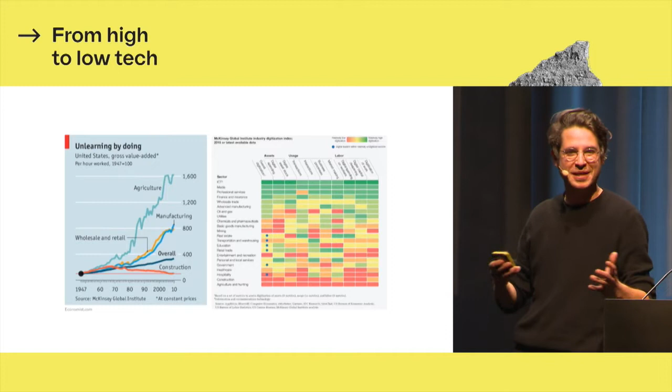But actually, that's not entirely true. In the Western world, agriculture is highly automated. So the only profession that is less automated than construction and architecture is hunting, which I hope we keep like this, because hunting should be a craft, right? We don't want to start hunting with robots and drones, I hope. But I don't believe that construction and architecture should be a craft. I think we should actually consider automating that.

That's 1947, right? So we could say that since Le Corbusier started building the Unité d'Habitation in Marseille in 1947, whatever we have done in architecture and construction has not fundamentally changed anything. Despite BIM, despite AutoCAD, anything. We're not building any better now than we did then.

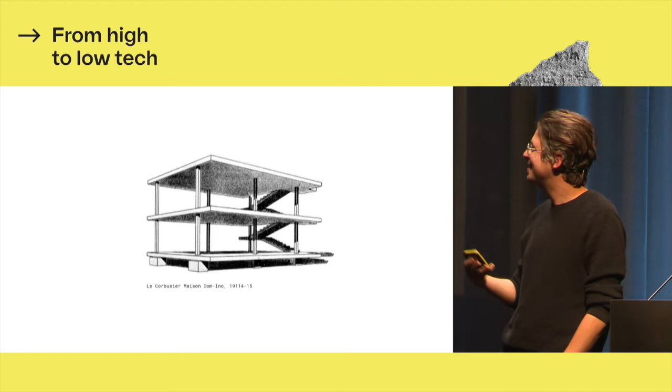That also means that this model, probably one of the most stupid and at the same time one of the most intelligent models, is still unbeatable. This is the best model. We cannot do better than this, right? And that's the beauty of architecture. If you try to be too smart with architecture, it always hits back at you. It's quite a blunt profession. It doesn't tolerate too much intelligence.

But it could maybe have been us. It could maybe have been us architects building these 2 billion homes, if we had not stopped thinking about it. In 1972, modernism officially ended, according to Charles Jencks, with the detonation of one of the largest housing projects in the world, Pruitt-Igoe.

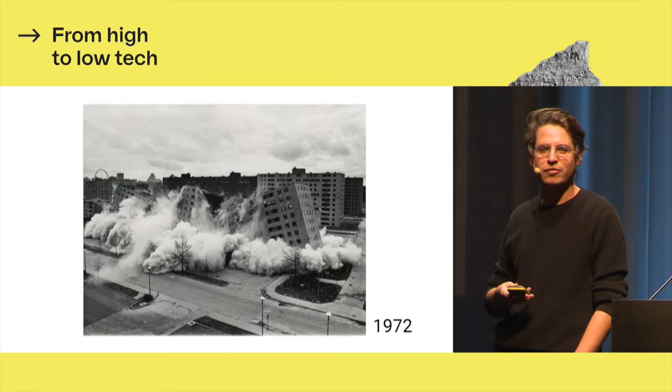And since then, we have stopped that project of thinking on a large scale about architecture. We have stopped being utopian. We have stopped kind of believing in a future and also in a kind of societal role for architecture. And since then, architecture is this. I'm from Belgium. The entire architecture world is now Belgium.

I call that Belgification. So Belgification is, on the one hand, a gift because Belgian architecture is extremely beautiful. It's very well crafted, it's very creative, but it's also extremely, extremely small scale. These people will not build 2 billion homes for you. There is no idea about building 2 billion homes.

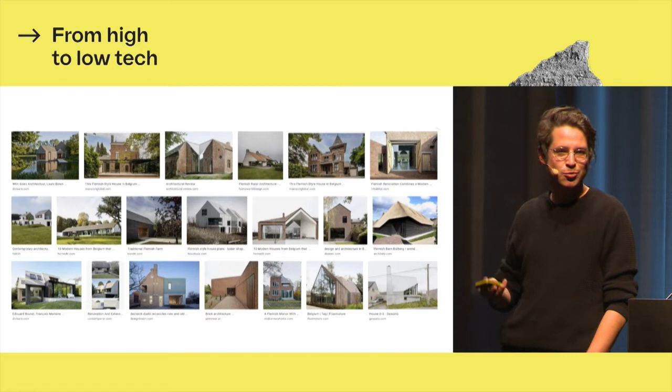And it's not only Belgium. I mean, Spain has been Belgified since the financial crisis in 2008. There were some big ideas in Spain, but now they're gone. Now they're just doing really beautiful, really good work. France has been radically Belgified, which is nice because normally France does things to us, so now we do things to France, so that's nice.

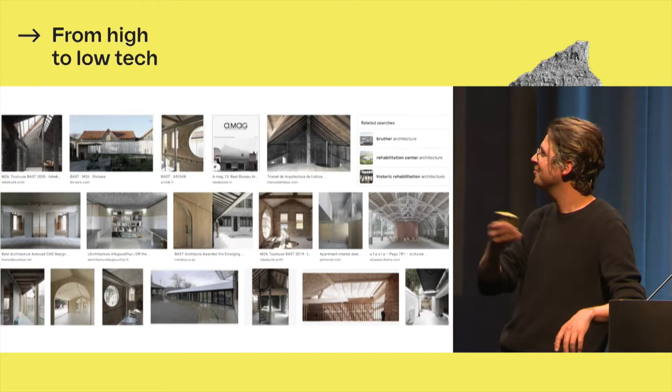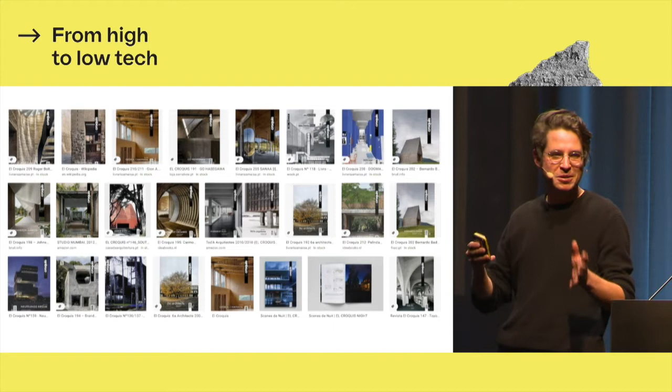But generally, are there any intellectual ideas today in architecture that are able to tackle even that question, right, of building homes on a massive scale? I mean, architecture, I believe, truly has never been as good as it is today. It's just incredible how much incredibly good work there is. I can't buy all of these books. It's just endless. And there's so many good practices, but they're all what you would call boutique practices. 10 people, 15 people, beautiful houses, beautiful libraries, maybe here and there.

And that model of architecture treats every building as a prototype. Every day for an architect is a new day. This is architecture today. It reminds me of this really bad Adam Sandler movie, which you absolutely should not watch. So he's dating this girl, and she forgets every day her entire life. So every day they need to start dating again from scratch, right? It's nice in Portuguese, like every day is the first day. And that's architecture. Every project we do, we start again from scratch.

And my question is really, and that's maybe the main provocation, if a building is good, why don't we repeat it? What's the problem with repeating a good building? If you design a good building once, why don't we do it 1,000 times if it's that good? Like London, where I live. London is a repetition of the same building. Every building is the same building. It's a pretty good building, not particularly interesting. There's no concept behind them, but they're pretty good. Everyone wants to live in them. And why would we have to design every building again? If you have a good one, why not repeat it, right?

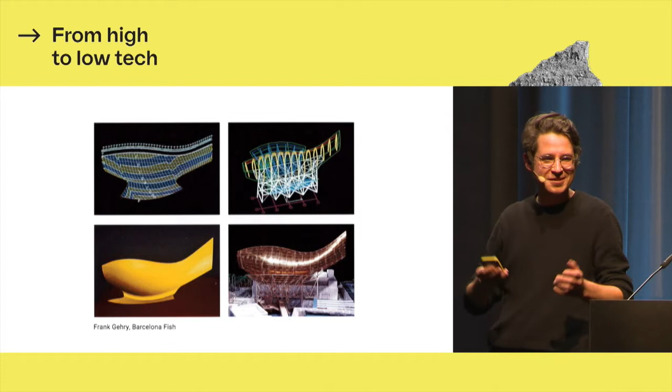So it could have been us, architects. It could have been us also when we started to work 20, 30 years ago with digital design methods. We were really good at that. But the question that we were asking, what to do with these digital methods, had nothing to do with a societal question. It had nothing to do maybe with how it could change the profession of an architect. It was actually a boutique question. It was how to, instead of repeating buildings, make sure that every single building is even more different than it was before. Right? So that is the kind of architecture that you associate with digital, like what I learned in school many years ago.

And again, it's not that I don't like this work. I think it's very optimistic. I think it's interesting. It was daring. It was also completely defined by a context before the financial crisis, by a neoliberal context. There's no housing there, right? These were museums for wealthy people.

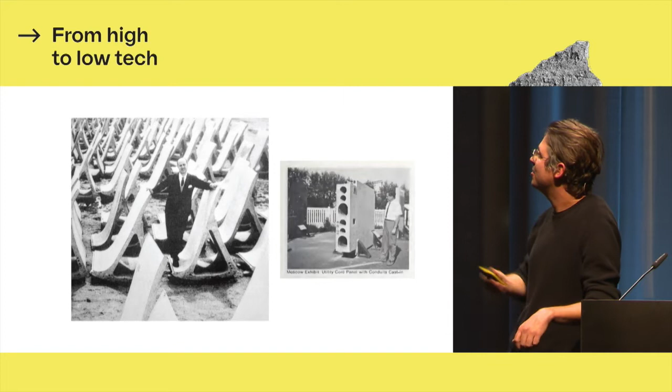Oil sheikhs, etc. But it could really have been us, I think, if we look back at what's happening both east and west of the Berlin Wall in the 70s, in the 50s, with people like Miguel Fisac who are questioning fundamentally how we should build. This guy tried to make his own factory. He designed the elements that he wanted to build with. He was not going to build with a brick or a piece of timber. He wanted to reset construction from scratch and reinvent it. Or this unknown Soviet engineer, I find this a beautiful picture, who's posing next to the panel that he has created, right? It could have been us.

It could have been Walter Gropius and Konrad Wachsmann. After they left the Bauhaus, they started the General Panel Corporation in 1948 with the idea to build 10,000 homes a year in the United States. They built a factory. It produced 20 homes. And it was a beautiful idea. It was the idea to repeat one single idea for a building 10,000 times.

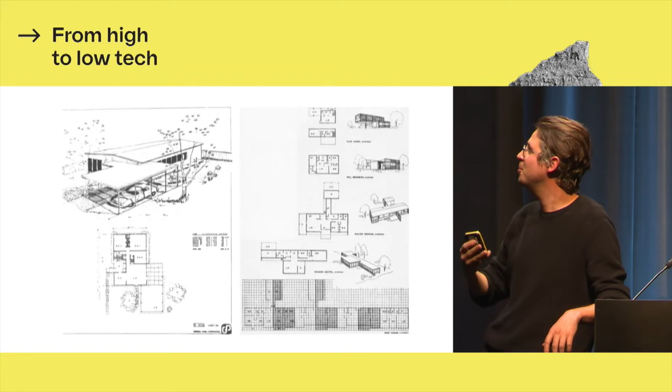But never exactly, because ultimately they are architects, so it would never be exactly the same building. Every building was a combination of parts, and it would always result in something slightly different. They were even teaching this at Harvard. The students could only work with this kit of parts of Wachsmann and Gropius, and then you could design buildings with it.

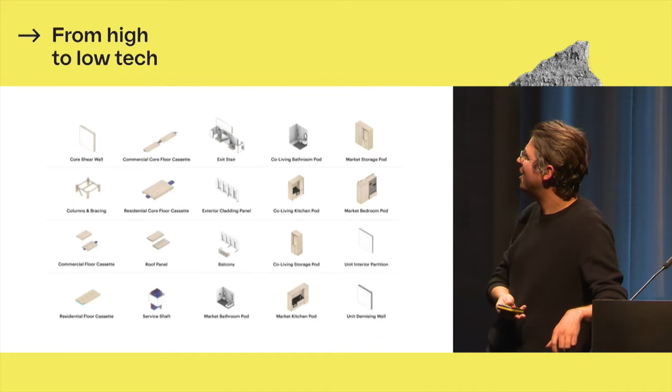So who will it be? It will be tech. It will come somewhere from this soup, which is a kind of a crazy ecology that we call the construction tech markets, which are companies that are engaged in all kinds of little bits and pieces of the value chain of how buildings come into being, from development to construction. And there's a small group somewhere there in the middle, Blokable, Juno, Woho, which are companies that are ironically doing exactly where architecture stopped in 1972.

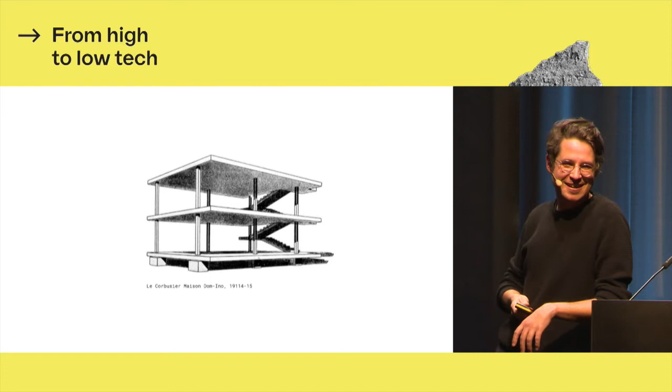So 1972, the idea was that mass housing was a social democratic socialist project. And it got stopped because we entered another era of neoliberal capitalism, Thatcher, Reagan, etc. So that project stopped. And now, ironically enough, the pinnacle of capitalism, venture capital, is looking back at where we stopped as architects and is taking this into a new context. So they are working with, in a way, this guy here, and they're trying to automate that guy. And they're trying to repeat this guy thousands and thousands of times.

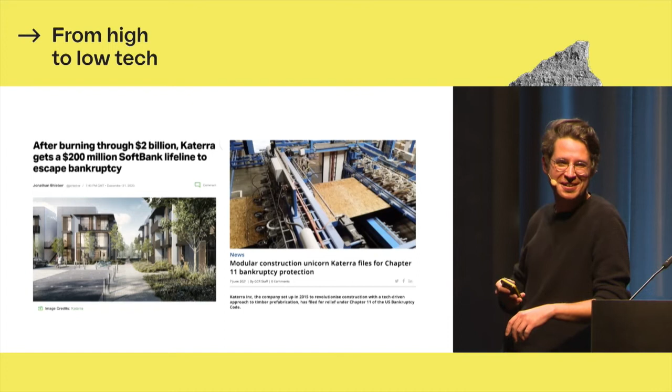So this is the house of the future. It's not very exciting, right? But on the one hand, it is also very exciting. It looks kind of unexpected, but this is really the house of the future. That's an automated house. But maybe the good news is it's not happening, because the company who was behind this was an American company called Katerra. They got $2 billion in funding that was thrown at making this house automated, and it failed. They went bankrupt, which is again kind of the beauty of architecture. Even with 2 billion, you can't do it. It's a long journey still.

And part of the reasons, I think, also is because they left really off where modernism started. They shouldn't look that much back. They should actually look maybe a bit more recent at what we could actually do with new technologies, with robotics, with automation, with AI, and not try to replicate the Soviet Union housing factory with venture capital, which is what they were doing. We need to be optimistic. Optimism is a moral duty.

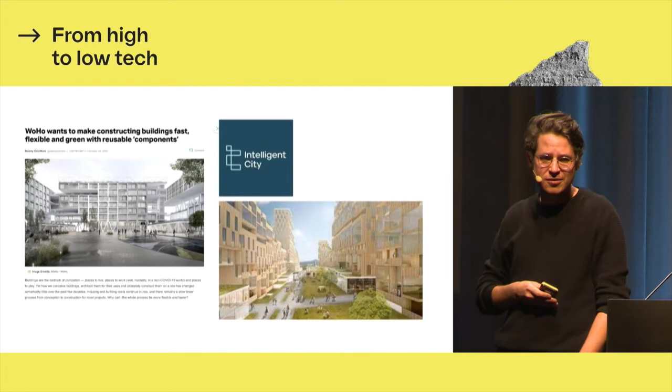There are some really interesting companies actually started by architects in this tech world. So there's Woho Systems, which is founded by Antón García-Abril and Débora Mesa from Ensamble Studio. They're doing fantastic work. They started a startup, they got funding, and they're trying to push beautiful prefabricated systems, very intelligent ones, into the world. There's Intelligent City, which is based in Vancouver, but is mainly populated with young architects who had been studying in Europe, in Stuttgart, and brought knowledge of robotics and automation to this company. And they have a beautiful vision on what architecture could do. So that's some of the provocations.

And now some propositions. So I will slowly guide you a little bit to how we are approaching this. And I'll do that a little bit with the work of my research lab at UCL, which is called Automated Architecture Labs. My own architecture office, because I also have a boutique little practice that does tiny little projects. That's called Gilles Retsin Architecture. And then ultimately my tech company that is called Automated Architecture AUAR.

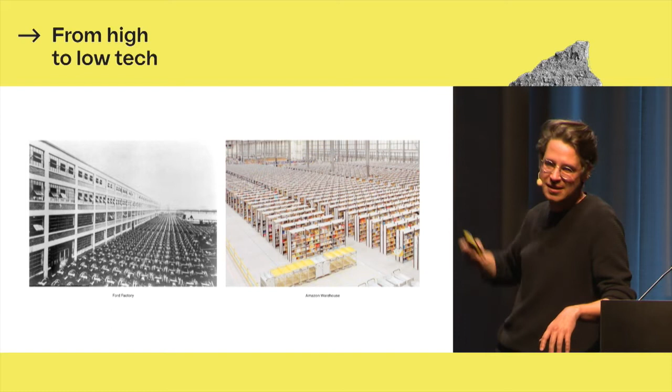And at least you see there's an ambiguous relationship, right, between these images. On a very superficial level, they don't look that different. Of course, they are terribly, terribly different. The people who work in the Amazon warehouse are gig workers. They would never be able to be like a Ford employee who was paid a decent salary and could buy their own car. That's social democracy. This is something that we maybe don't know anymore what it is, some form of neoliberalism. But we could consider automation as a very important project for architecture, probably the most important project for architecture. So that's why you should buy this book.

You can buy it on Amazon, on this evil warehouse there. You can buy this on Amazon, Robotic Building, which also has contributions of some of Fabio and Matthias and many others here, which tries to kind of lay out that paradigm, right?

Automation. And also automation, it's important, right? Because it's not only a technology, but it also has immediately socio-political consequences. There's immediately questions around labor, around work, around who is benefiting from this, who owns these robots, who owns these factories. There's many funny questions in the book there, like what is a robot? Is a washing machine a robot? These are all questions around automation.

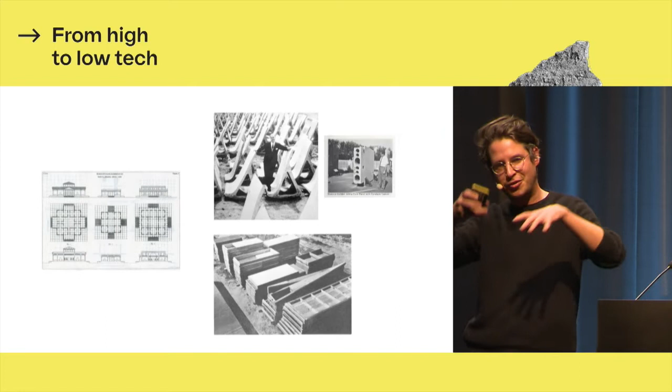And we took a specific position towards automation, and it's not the only one. You can take many positions, but my position is that I truly believe that the solution to automate architecture lies in one of the most simple and banal ideas, and that's the idea that architecture is made of parts. And that's a blunt and an interesting statement, but we could actually do a project for digital technologies and automation, not about funky surfaces or Zaha Hadid buildings where everything looks very different, but really about very simple building blocks, very simple parts, a disciplinary history of architecture.

And the unique thing is that these are parts that precede buildings. So today, if you design a building, you first design the form of the building, and then you figure out the parts for that building. This is completely the inverse. We have to design parts that exist before the building exists. Parts that don't know about the building. And architects have always tried to do this, and they've also always failed, to be honest.

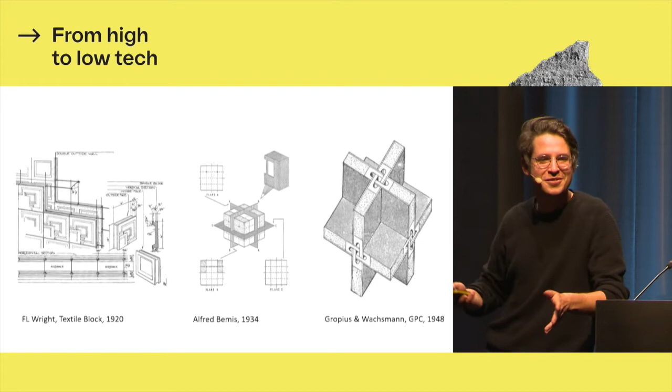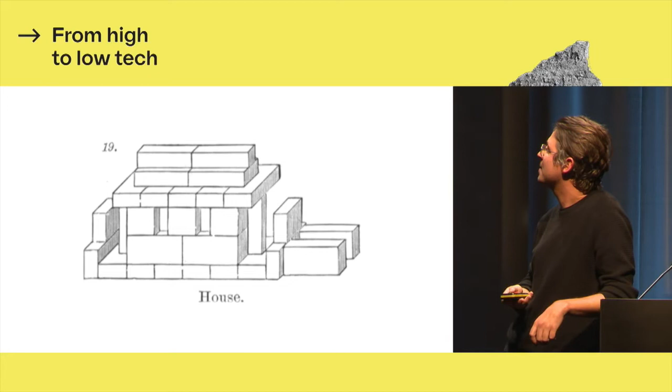But of course, you have Frank Lloyd Wright, who designed the textile block, Alfred Bemis, who designed a universal cuboid, as he called it, and then Gropius and Wachsmann with the General Panel Corporation. Or also, again, Frank Lloyd Wright, when he was playing with Froebel blocks, the little timber blocks that you maybe played with as a child, right? Or even, you know, the primordial essence of architecture was parts that preceded the building. You would find these parts in nature, you would stack them, and then you have a building.

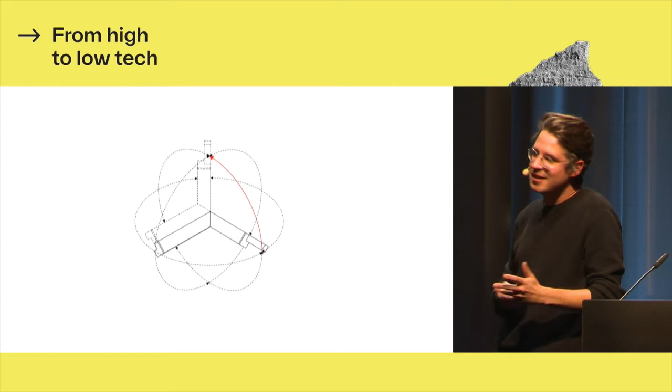So we approach that through the question of building blocks, which are elements that have no specific function. They're not columns, they're not beams, they're not doors, they're not windows. They're generic elements that have to be good at anything. And we design those elements specifically in such a way that they are good for robots. Bricks are made for humans, building blocks are made for robots. In the same way, you know, Louis Kahn, like the brick fits in the human hand, etc. And these elements are very generic and very stupid and very blunt, right? And they just need to be sure that they can always do the job.

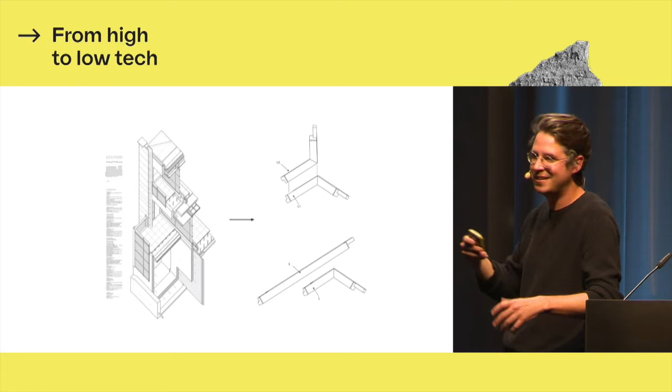It's a little bit like a Volvo, you know, the philosophy behind Volvo cars is that they never need to be really good. They just need to be a 7 out of 10, not an 8, not a 5. It's the same with these blocks. At everything that they do, they just need to be okay, right? And it's really the idea to forget everything that we learned about architecture, that entire messed up world of how we build buildings today out of thousands and thousands of parts that you need to cut into tiny little pieces to fit the sketch that you have done on a napkin, and then these parts travel from all over the world and are sold by annoying salespeople who send you brochures. That entire world disappears, right?

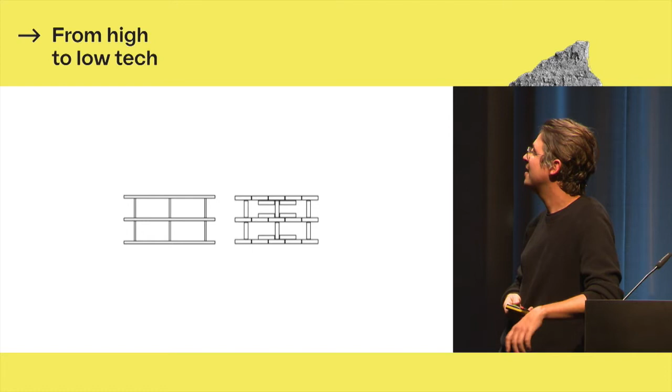We reset architecture from scratch and think, first of all, with which material, which parts are we going to build architecture today? That means that this Domino, that very dangerous and stupid and super smart and intelligent model that keeps following us, maybe disappears. And it doesn't disappear in a superficial way. It disappears at its core. The diagram on the right is no longer a Domino. Nothing in that model is shared with the model on the left. It's an entirely different idea about space, about design, about production, and possibly, as we'll see later in the lecture, also about the model of the architectural practice. And this is a little bit the manifesto behind that thinking.

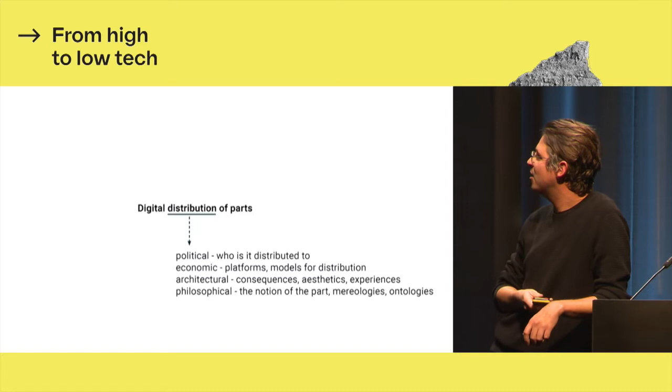So automation, my position in automation is that automation would mean the digital distribution of parts. And it's all about the word distribution that allows us to talk politics. Who is it distributed to? It allows us to talk economics. What are the platforms and the models for its distribution? It allows us to really be true architects and talk about the consequences, the aesthetics, the experiences of this distribution of parts.

And then you can also be philosophical about it. So I'll show you a little bit of some work that we're doing in our lab in UCL, which is work that is not immediately applicable in today's world. And then I'll show you some work of my boutique office that shows a little bit how it is applicable in the real world. So that could be kind of a fully automated architecture, right?

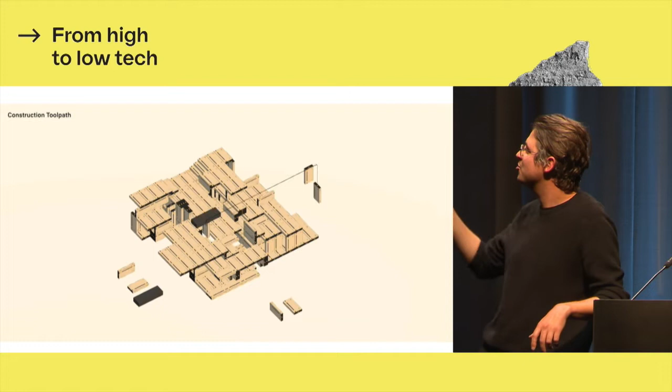This is a kind of an abstract robot, it's not even shown, that is just stacking these generic building blocks and piling them up, growing it almost into a little building. And I think you will see the little robot, that's actually the robot that assembles it, walking over it. Or it could be this.

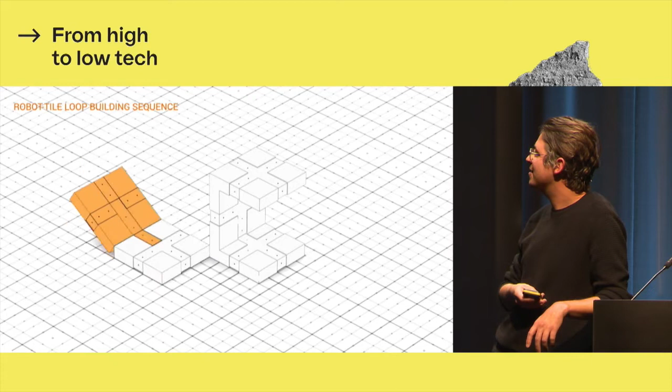This is kind of a vision of a fully automated architecture where the orange block is a robot and it grabs the white block that is not a robot, that's just a brick. And it flips around and assembles structures. And then some of these robots could collaborate with each other and build walls. That's one of these robots walking around in the corridors in the Bartlett in London. And yeah, doing funny things.

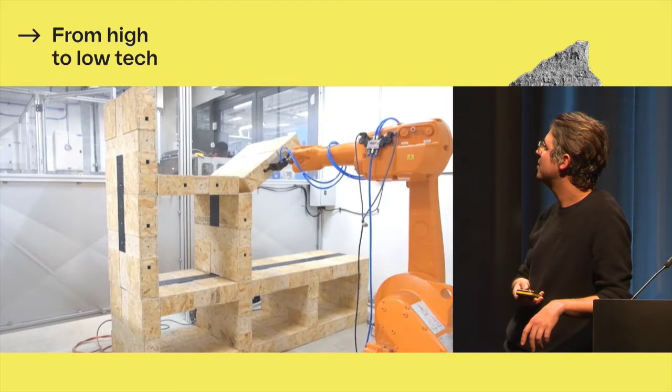Oops. Then we tried that out on a larger scale to simulate how these robots would work with industrial robots, showing their assembly. We use AI to train these robots. This is a process called reinforcement learning, where we basically bully these robots thousands and thousands of times until they learn how to do the job.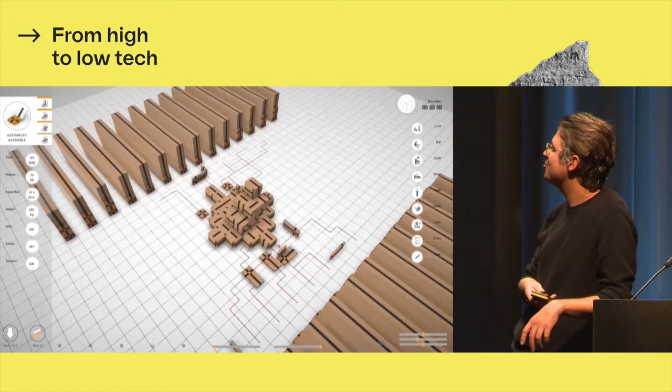And then we speculate on these scenarios of assembly, right, of how you could distribute a program. You would dump a few containers with these robots, and then thousands of these little robots would basically grow your building. So it's a strange version almost. I would say that this is almost actually an organic architecture, although it only consists of straight parts, right? But you could almost say that this is a truly organic architecture. You could also say it's modernist because it's repeated parts and modules, but it's actually totally not, right? It's purely thought through a digital method.

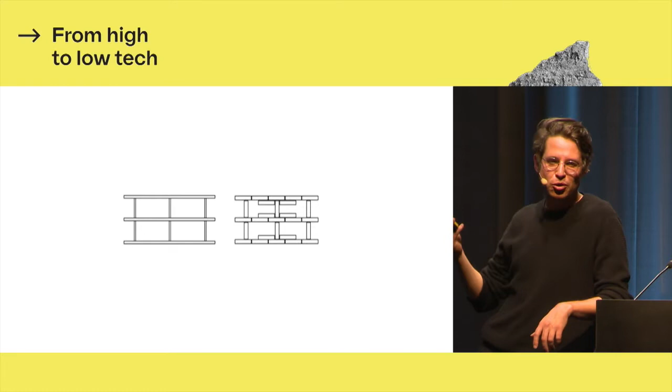So that's a little bit the work we do in the university, but then with my own practice, I try to build little homes and win little competitions as a cute boutique architect in Belgium. And there we try to explore that model and also truly understand what it means for architecture beyond maybe the technology. Like what are the consequences for space, for the experience of these spaces, right? Like what does it mean if a building is made only of these generic parts?

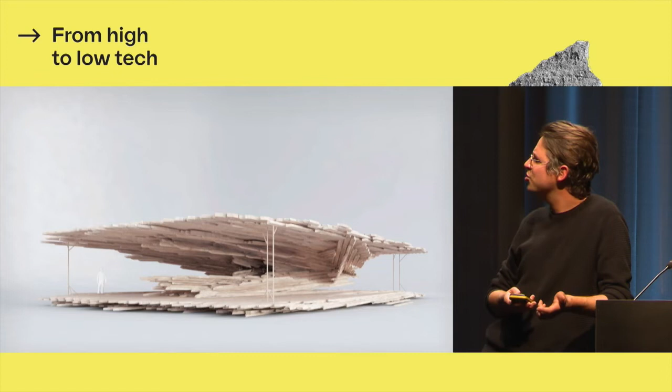This is the first time I tried this. It was a very naive attempt. So I made this arrow-shaped brick and then aggregated that, and I ended up with this model which I really liked because it looked extremely strange. It's an assembly, it's modular, it's all repeating units, but at the same time it also looks strangely organic and strangely natural. And I thought that was very interesting. And I was cheating a bit. Only the white parts are repeating, the red parts are customized, but they still have repeating connections.

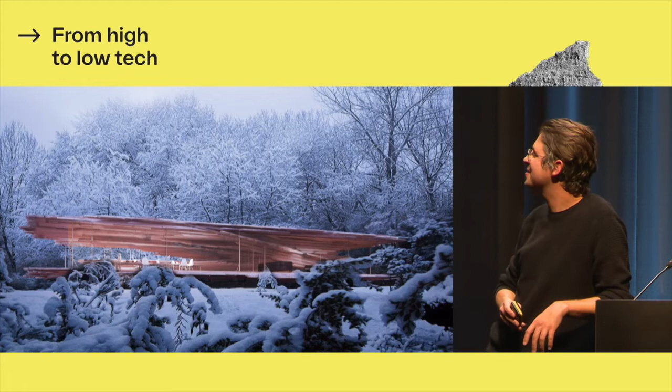And I really liked the outcome of this, although I had absolutely no idea how to build this thing. I could never build this. But I really liked everything that was in this model. I thought it looked primitive, it looked assembled, it looked strangely natural, but yet still maybe also reminiscent. You would immediately know that this is made for humans, because of the flat articulation. But I thought this was really a truly interesting language.

So then I had a chance to build that. I won a competition for a small pavilion in Tallinn, and I decided to build a domino, a maison domino, but in this method, to show it's like an abstract unit that wants to be repeated. And it's built essentially of these blocks, which again are arrow-shaped. That's just plywood, so it's just timber, super cheap. One sheet of plywood is one block.

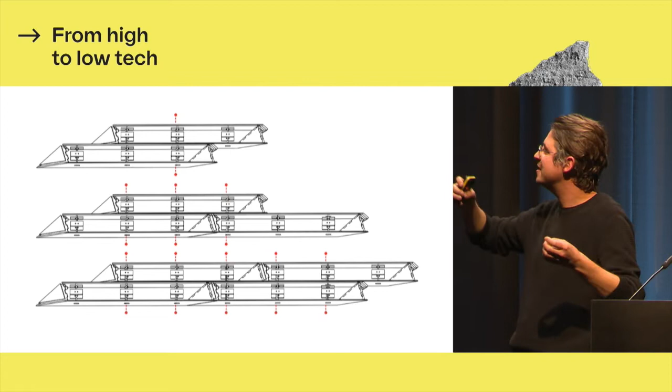And then they're connected with very long steel threaded rods that keep this together under tension. So you can always undo the screws and your building comes back to its parts. And you can use these parts again to build other buildings. So with the same parts, you could build a whole variety of buildings. You see here these Lego blocks for adults, right?

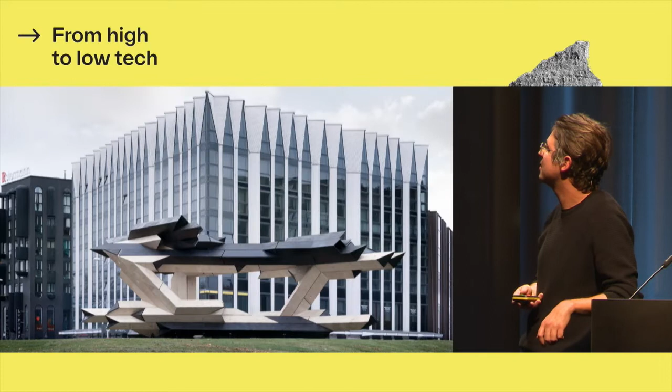Really large models, and then it looks very different from each side of the pavilion. So it was kind of a playground to explore these different qualities, sometimes more rectilinear, sometimes more jagged. Pretty crazy architectural moves that you could do with this, while at the same time it was super, super efficient, both materially efficient and labor efficient.

And of course, this is then the idea for the speculation on what this pavilion would look like as a kind of housing block, where every instance of this housing block could be different while repeating everything at the same time, right? This is just one element that keeps repeating. So an apartment doesn't have to be like a 1, 2, 3 bedroom apartment or a studio, but every single instance could be different.

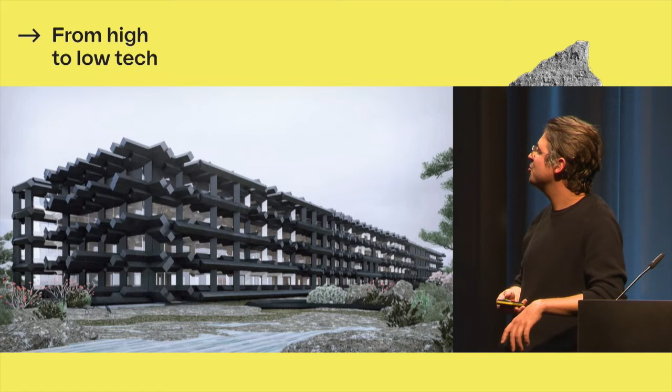And then I did this other speculative model, which I think is one of the best examples to understand what an architecture that only consists of parts that precede the building, so parts that do not understand the larger building, would look like, a pure kind of aggregation, right? There's no columns, there's no beams, there's no floor slabs, there's just a straight part and an L-shaped part that are repeating and aggregating into this form.

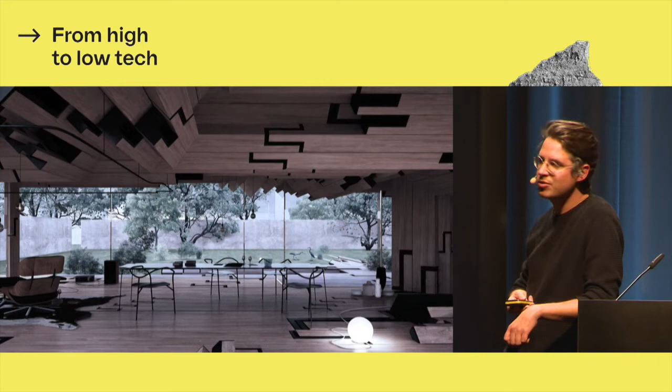And it looks massive, but actually it's not massive. This is not massive timber. These are, again, very thin sheets of timber. So this was a house, kind of a multi-family house with 3 apartments. And then I think, again, from an architectural perspective, this is a very strange space. It's actually also like a cave, right? It's a very primitive space, where the same material defines everything around you.

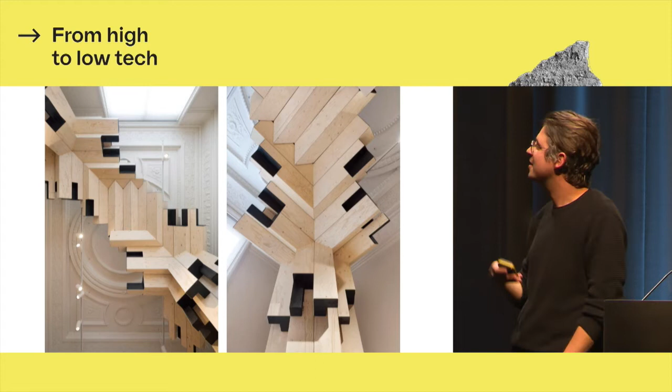And then I had a chance to build a section of this in the Royal Academy in London for an installation. So we built a small part to really be able to sit there and be there and explore how it works, and also to prove that, at least in a museum context, we could build this, right? These are parts of the ceiling.

And then recently, with the boutique practice, I convinced a client, an innocent client, to try this out for his house. And it's a typical Belgian project. It's a kind of house extension, and it's very simple. It's a very boring architectural idea, actually. It's just a surface and a column, right? 3 columns that carry this kind of table with a roof light.

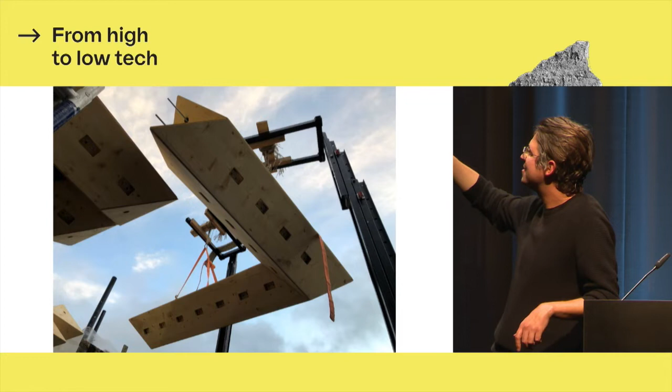Then we built it, so we built it ourselves together with the client. So we pre-assembled these massive blocks. You see the tension rods to connect these blocks together. And we just added these pieces together and assembled that into the building. A very strange building site where you're just playing around with these large blocks and slowly growing the building on the site. We did that in 4 days. We had it built just before Christmas, so that was very nice.

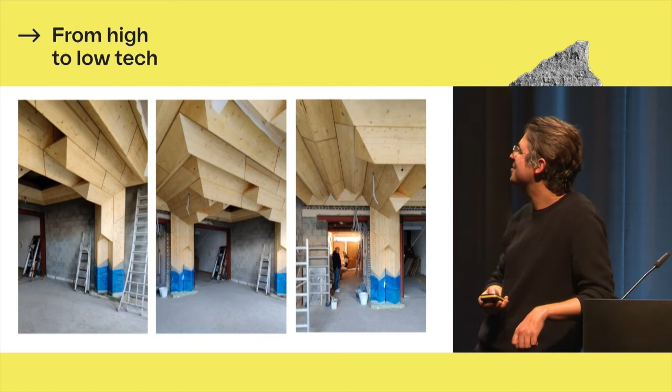And then I think this is quite interesting to consider, because this is not anything expensive. This was super, super cheap, like dirt cheap, right? And it's still, I think, an incredibly interesting and exciting and strange space, which has these primordial and primitive qualities, the things that we know, the column and the roof. But then it becomes really interesting that actually nothing in this building has anything to do with how you would build today, right? And purely the consequences of these parts result in these strange hybrid qualities of that building.

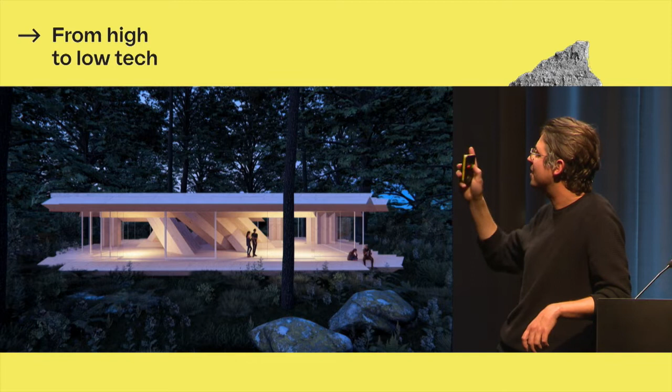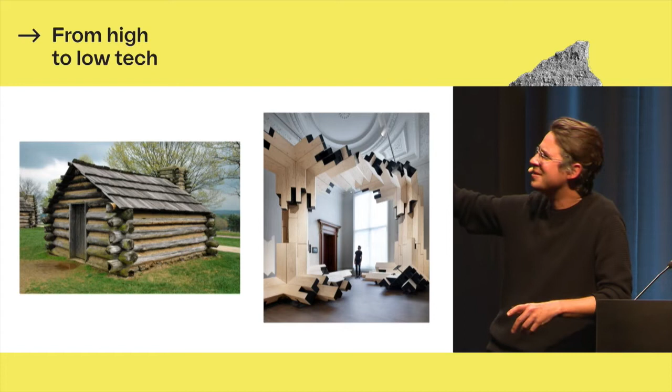And then these are some other speculations for a villa in a forest which play with the same idea. So that could be modular architecture, right? And again, I like that in a way it's a very blunt and primitive idea. It's exactly the same as what these guys were doing, right? There's no difference. The only difference is that doing that on the left today is too expensive, we can't do it, and it's not materially efficient. But this we can do today, right? But it's exactly the same. So really old and really new is maybe the same, right? Maybe we end up where we started, and I quite like that.

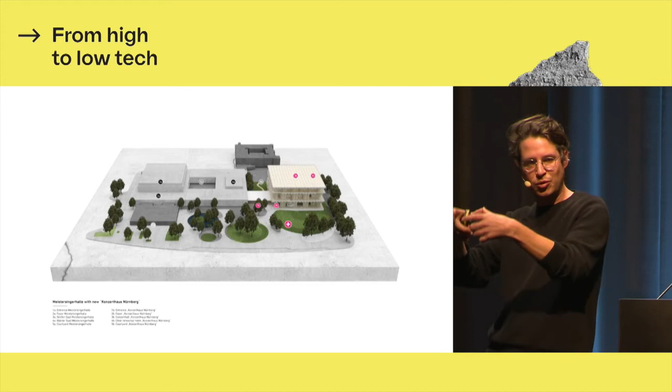And then the question is also, how scalable is this, right? How would you do that on a larger scale? So one of the competitions that I did, where we ended up in the last round, was for a concert hall in Nuremberg in Germany. So we had to extend the existing concert hall. So to trick the German jury, we just designed a simple square block in the first round. So the Germans were like, perfect block, yeah.

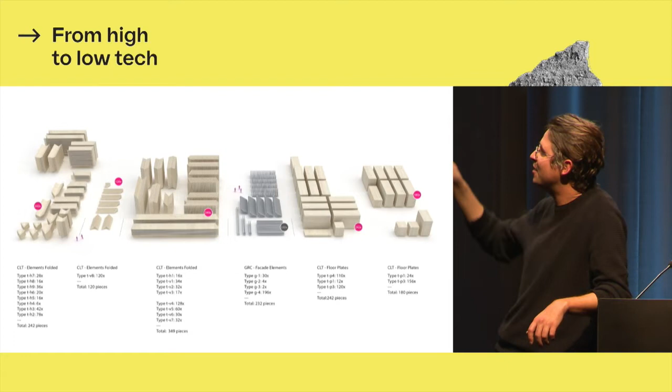So they chose it, but then in the second round, it turned out that this block was Pandora's box. It had nothing to do with any kind of standards or ways of how you would build a concert hall. The entire concert hall is laid out flat here. It's completely made of CLT sheets that form a limited number of repeating modules. So that's everything you need to build a concert hall. And then that's the computational idea.

We just had, I won't go in detail, a voxel space with lots of these little V-shapes. They aggregate, and then they get formed into these extremely repetitive modules, right? And then it results in this building, which I think, again, is kind of like a timber cave. It's a monolith. It's highly repetitive, yet also differentiated, like nothing. It's not a simple repetition.

And again, I think this building is extremely radical. It's not a box. It's a building that has no columns and no floor slabs. There are literally no floor slabs in this building. There are no columns. The parts that you see in the wall are exactly the same parts as in the ceiling and even on top.

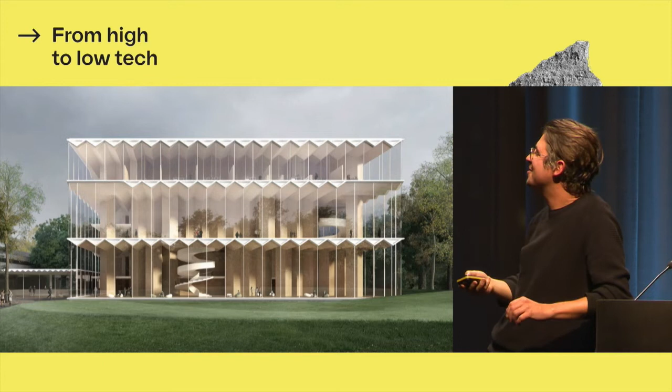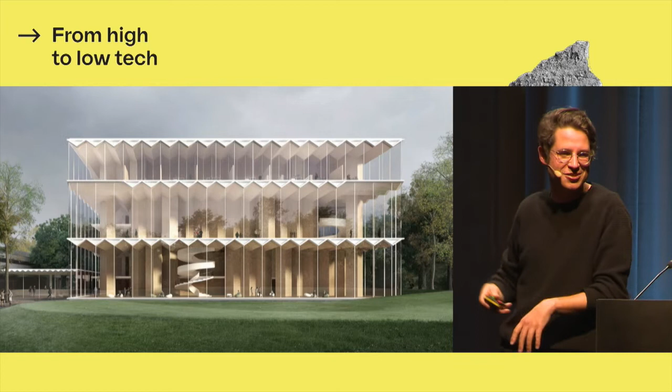And of course, I was willing to compromise on this, but our engineers from Bollinger Grohmann had calculated that, because of fire regulations, the sections of timber at the bottom have to be the same thickness as the ones at the top. If you would build this without fire regulations, you could use thinner timber on the top. But fire regulations override everything. So they said, we just use the same section of timber everywhere in this building. So literally the same parts are repeating.

And then there is an exception. You always need to know when to stop. Don't do everything with these parts. At some point, you need to throw in an exception. For example, anything that caters to the human body, I personally don't want to do that with blocks or with my parts. Then you need to throw in something else. So I asked a friend of mine to design this staircase and put it in there. And again, I think this is radical and organic as a space.

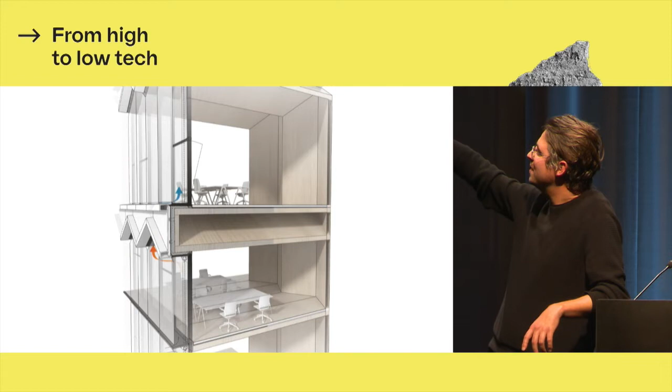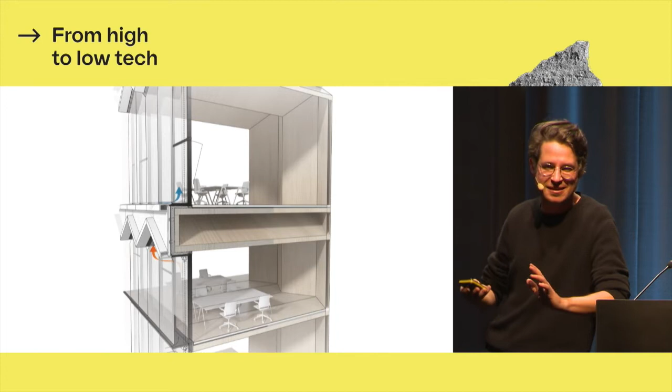And probably the most extreme radicality of this proposal is maybe not its form, but the way it would be produced. Only the first 10 centimeters of this building are the existing construction industry. That's the glass, the Apple shop glass, super expensive, an existing product that is a commodity. But the other 99.9% of this building is digitally fabricated just out of timber that comes straight from the forest. And that is, I think, amazing, and the most radical thing about this building. It's something very, very different.

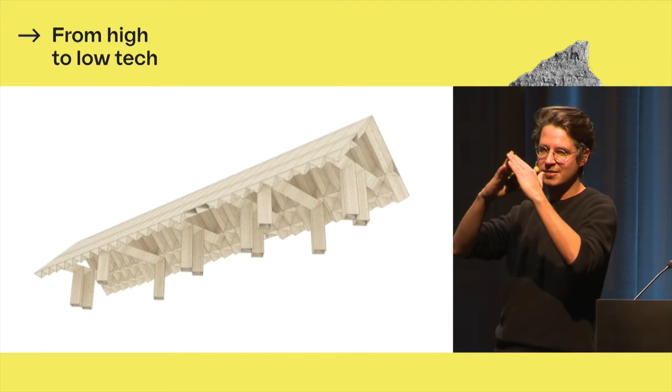So then I pushed this. We ultimately lost this competition, and then I won this competition, which is for a small museum building in Belgium, where we used exactly the same idea, because if you think that you have a good building, why start again from scratch? Just try to do it again somewhere else. We just rotated these parts in a slightly different shape. And it's again a boring idea. It's just the cliche of architecture. It's a gabled roof, nothing special.

But in the way that it's built, it has nothing in common, again, with how you would build architecture today. It's a repetition of these modules that are all prefabricated, and you attach them together, and purely through that aggregation, you get, again, quite an exciting space. And on the outside, it's just wrapped in EPDM rubber, there's no finish. We just close the building with the rubber.

Yeah, but then the question is also, how simple can it be, right? I have an obsession with these triangular elements because I think they're beautiful. But at the same time, I wanted to try out what it means if you do this really, really blunt and make it as simple as possible.

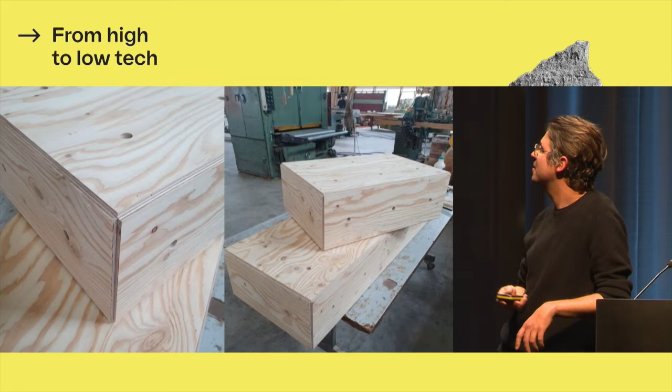So I built this installation in Seoul in South Korea, where I decided to build architectural models because I like architectural models. The only thing is these are ultra-large architectural models. They are scale 1 to 2, so this building is half the size of the actual building. And there are 2 houses. And you see this is my local Korean team who is building these models and sitting and climbing over them. And they are just fit together again with cables. So you see the cables sticking out.

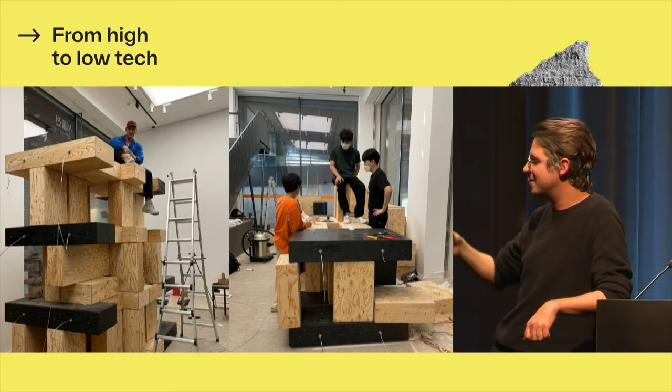So these are just hollow timber boxes with a cable, and then you span the cable and your building is put together. If you're bored with your building, you undo the cable and you can take your blocks and you can start again. And it's very fascinating for me, this would be exactly how I would build a building. So the architectural model is actually also the same thing as the building.

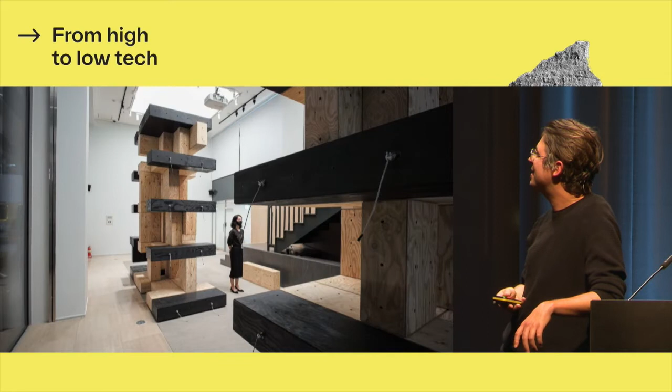And there's one really boring one, really kind of like a domino, and then one that is maybe a bit more exciting. I quite like the dialogue between these two models. And then you see the scale of these architectural models. I didn't manage to go there myself. It's very sad because of COVID, so I've never seen them in person. But I imagine that it's quite interesting to study these models, right?

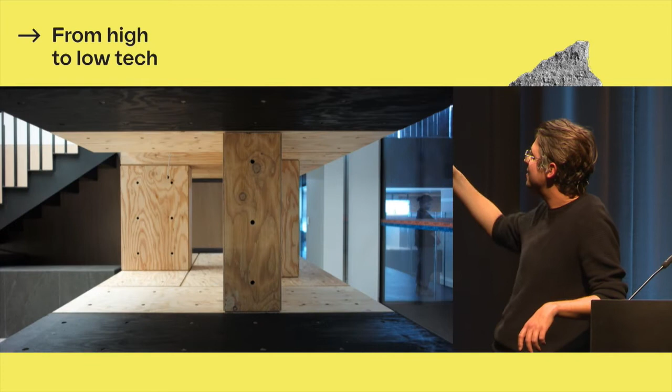And then put your head into these spaces, and see how these two models, the more boring one and the maybe more exciting one, which kind of spaces they create with the same parts, and architectural ideas that you can put in these parts. And again, the tension cable sticking out, and then you get these really primordial, primitive and basic architectural spaces. You can see maybe a little bit a Miesian space or a fluid space, and then another one is maybe a more brutalist space. So that's the experiments with the boutique office.

But then, of course, this is deeply, deeply contradictory, what I just showed you. I made an argument in the beginning of the lecture that we should think about housing, and I've been showing you cultural projects for museums, right? So that's just really sad that I put all these efforts in all this research to then do some museums and lose the competitions, right? And the real purpose of these systems is to be replicated by the thousands. It's really the idea of what I call beauty in large quantities or generosity in large quantities. Can we design something that doesn't have to be too special because we'll repeat it, but something that works in large quantities? And I've always been really fascinated by this.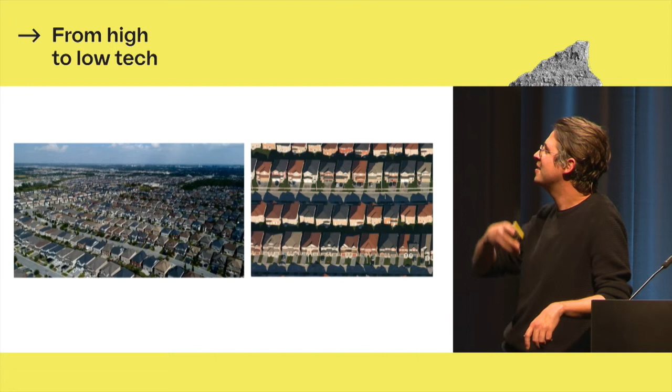Actually, I remember as a kid, one of the reasons why I wanted to become an architect was because I couldn't understand why modern streets with modern architecture are always bad. You can design one good house, but I don't know a lot of architects who can do 20 houses in a row that are good, right? And for me, that's the question of architecture. It's not that one good house, it's to do this 10,000 houses, in large quantities, and make it work with the same qualities as maybe the historic references. And to do that, you need to invent, of course, an entirely new model.

So we decided to make the leap during COVID. I stopped traveling and I was at home and all my colleagues were at home. So we decided to make a spin-out company from our university lab with the help of the university and some government funding in the UK, and really start a tech company. And now we've been doing that for two years. And I want to share a little bit of the work behind this. So the idea of the company is to build a platform for affordable housing. The mission is really to build high quality, affordable timber housing in huge amounts.

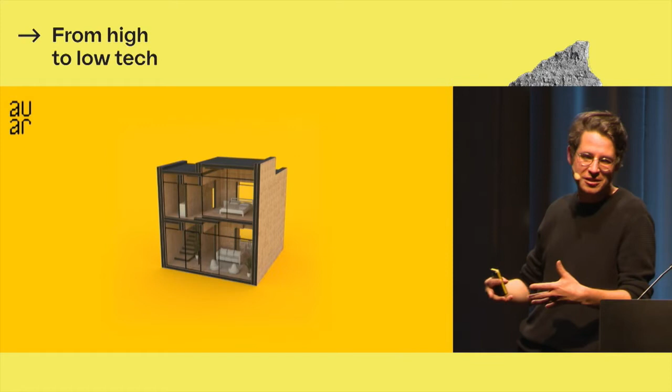The approach we take is not to build these large Soviet Union style massive factories that cost an enormous amount of money, but to build tiny little factories where we just have one robot that can build our building blocks, and can take these building blocks and assemble them together. So this is our little factory. This robot, in one minute, can build one box while we are in the pub having beers. So it's incredible that it can do this.

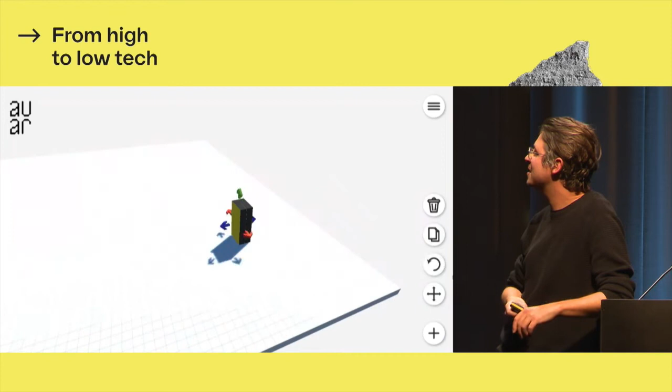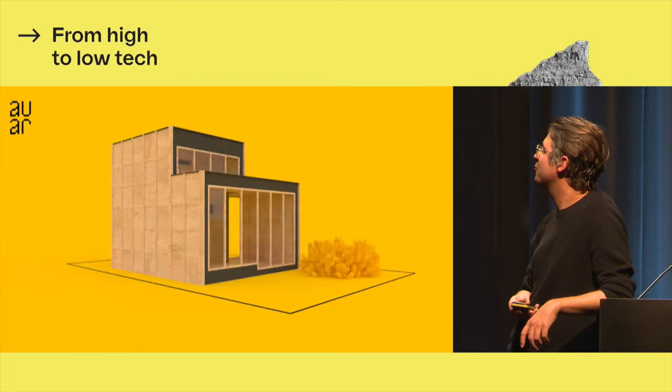Then we've developed, of course, a whole set of little software tools that help us understand the building processes, and also always asking where these values are, right? Why are we doing this? We're not doing this necessarily to make an enormous amount of money. This is really with the idea to be able to create a large platform for affordable housing, and to crack that question of an automated architecture. And that's the principle: we believe that by radically reducing the initial complexity of architecture, by building this building block that precedes a building, you could construct all these kinds of features.

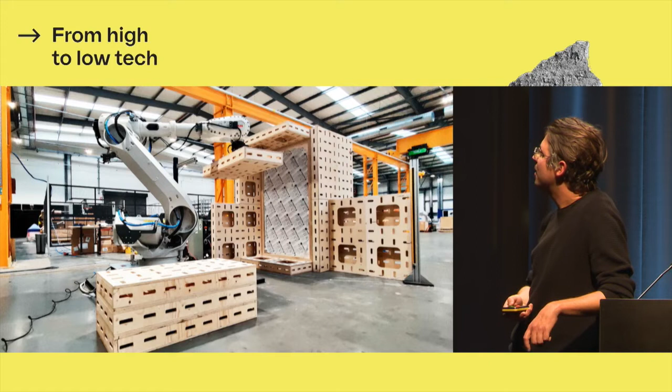And we started setting up this micro factory that's in Milton Keynes, close to London. We're doing that together with ABB, which is a large robotics company. And then we also started to slowly introduce an experiment very early on during COVID. We built this with a local community in Bristol, in a very poor area in Bristol.

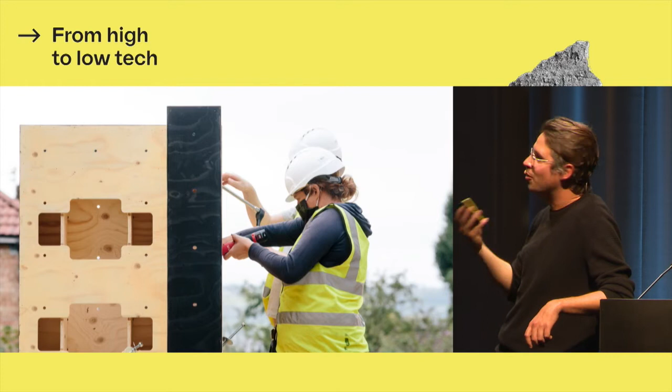We got together with a bunch of people who all lost their jobs during COVID and tried to work with them around these ideas of housing platforms and automated housing, try to teach them some new skills. And then we built together this housing prototype with the idea that the desperately needed housing in that area could maybe be accommodated by this. And actually this woman, Hannah, who was one of the people there, now works for us in automated architecture as our local microfactory person in Bristol.

These are some of the qualities which we started to explore in these buildings. Again, of course, in a pavilion, but questioning that affordable housing can be as exuberant and without any compromise, right? So there's almost, again, maybe a Frank Lloyd Wrightian strange space, and this is dirt cheap and affordable, right? It's not that if you do affordable housing, you cannot be interested in aesthetics and it needs to be sad.

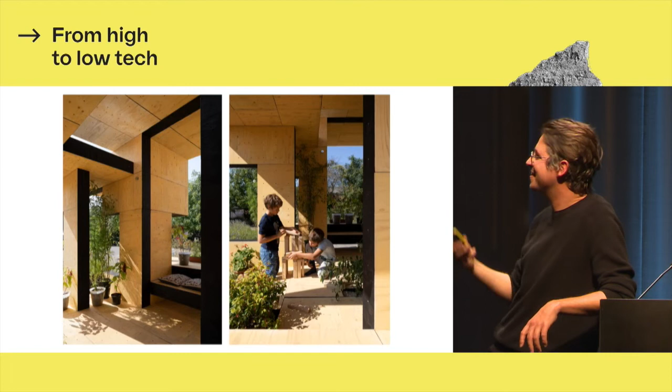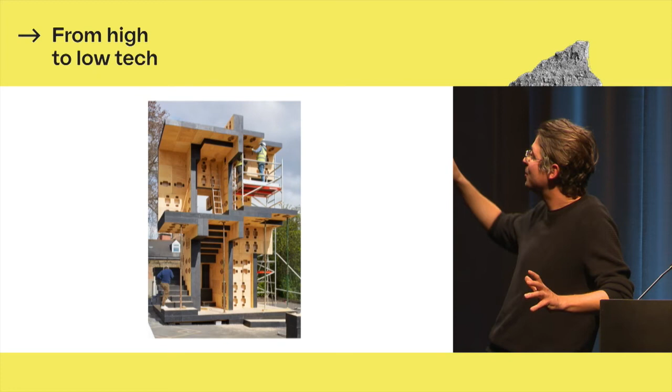This could be a very different world. Then we did a crazy thing where we built with Hackney Council, which is a local council in London. We built an enormous amount of these blocks and then assembled it into a 2-story house. Also to prove, for ourselves as well, the interesting question: could we really do this with exactly the same block? Just one block, built this entire thing. And it works perfectly. It has really big cantilevers again. It does really strange things.

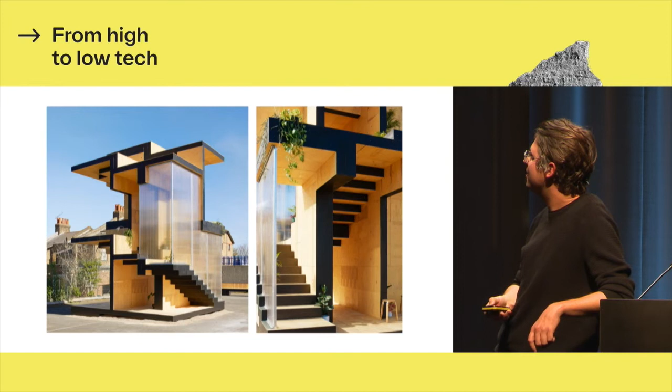And we presented this again to a very difficult community in London. We again presented that as a model for affordable housing, really saying we need to radically rethink how we build. And if we do that, maybe there are so many more possibilities that open up, right? So we did a series of talks in this pavilion. The mayor of Hackney was there, and they got very excited about this building system. Some of these qualities, and then again, maybe a little bit of a domino, right?

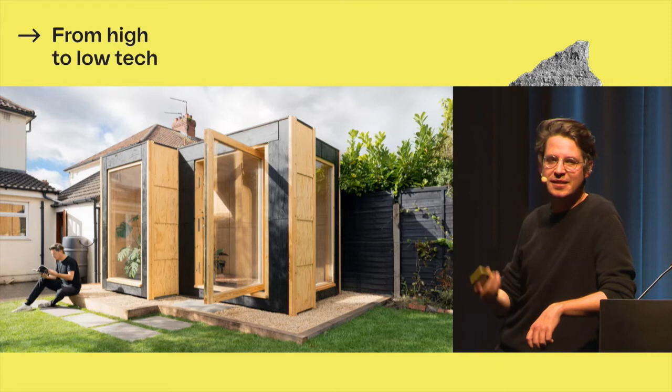And what we're doing now, because obviously it's easy to build this, because it doesn't have cladding or technical devices or anything. So now we're essentially building very humble and tiny homes, because we can build those at a very high speed. We can do it in like one a week if we want to. So we use this to very quickly iterate and try out, learn from the failures, and test our software, test our robotics, test everything very quickly on these small products, and see if we can completely produce that in an entirely digital way.

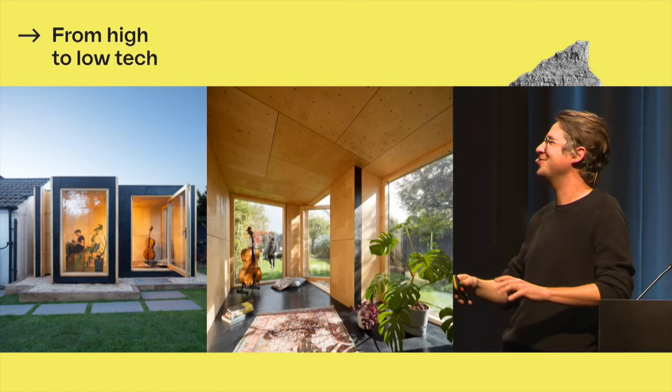And they're always made with the same parts, but slightly different. And again, this thing costs, well, in Portugal it would be maybe a lot, but in the UK it's very cheap, let's say. We're delivering this at a very low cost for UK standards. And we're quite busy, we have a lot of these cabins that we're building now. And at the same time, we're pitching for housing projects and starting to try to scale that up, right? While we're going for funding to do this.

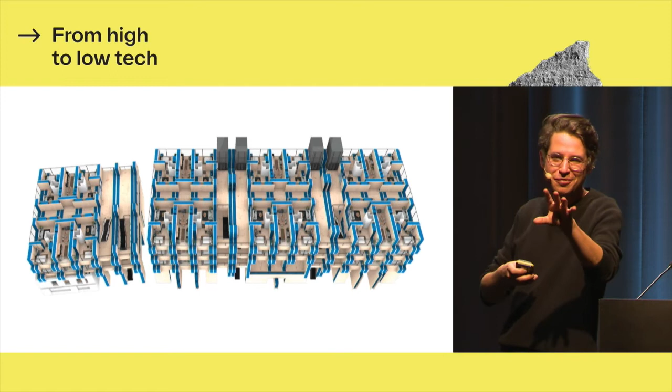So we want to go in the next 5 years from 5 to 10,000, the old dream of Walter Gropius, from the 5 garden studios to maybe the 10,000 of, who knows, apartments or housing blocks. And then maybe it could look a bit like this image.